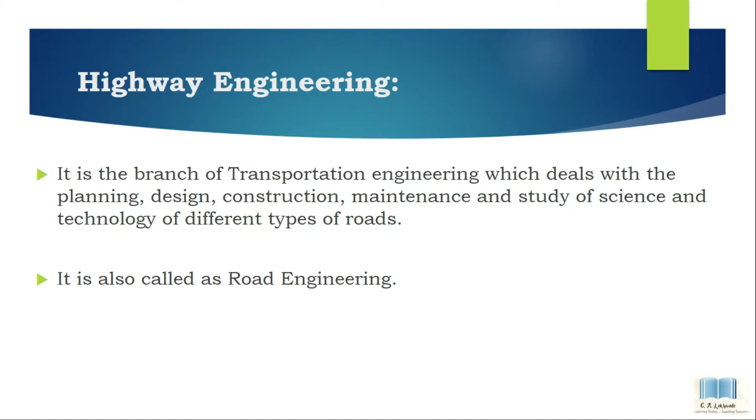Now we will discuss the scope and importance of highway engineering. As we know, population is increasing day by day, so transportation is very important and necessary. Transportation is directly or indirectly related to the development of a country or human beings. According to development, each and every facility is available in a particular area, and that facility can be provided if transportation is good and clean.

The first point is that easy and quick transportation of men, machines, animals, materials and goods can be made, meaning if transportation is good and well developed, then transport of anything becomes easy and quick.

The second point is that areas connected by proper means of transport can develop fast, meaning if an area has proper transportation, that city or town can develop very quickly. The third point is that remote and rural areas become accessible and communicable if connected by proper means of transport.

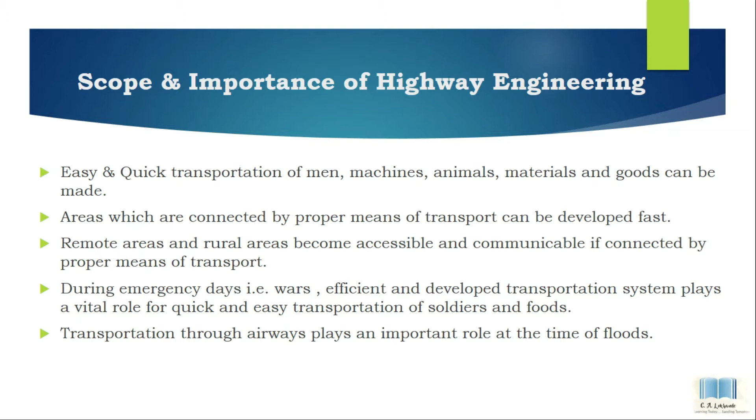Our next point is the modes of transportation system. There are 4 modes of transportation: first is road transportation, second is railway transportation, third is airway transportation, and the last is waterway transportation. Apart from these major modes, other modes include pipelines, belt conveyors, cable cars and ropeways.

The modes of transportation refer to the way we transport from one place to another place; that way is called a mode of transportation. The means of transportation are by land, water and air. Transport by land is feasible through roadways or railways, and both are easy and economical. The other means, waterways and airways, are very costly. So these are the various modes of transportation: road, railway, airway and waterway transportation.

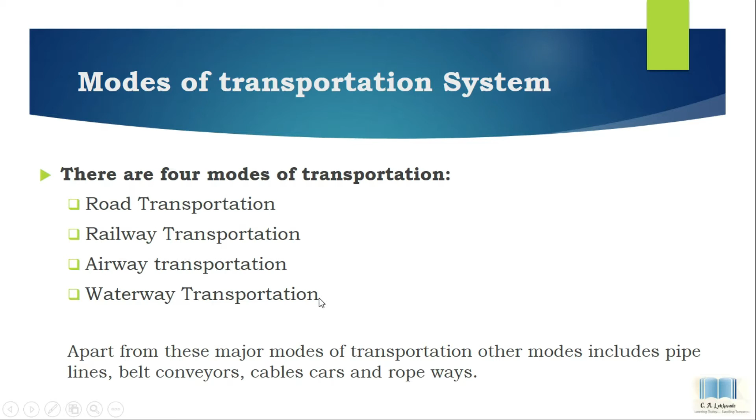Now we will see roadways or road transport. What is road transport? Road transportation is the most suitable type for short distance passenger and goods transport. It is suitable in hilly terrain where other transport modes cannot reach, and it is suitable for all types of passengers. It also provides door-to-door service. Now we will see the merits or advantages of roadways.

The first merit is a number of smaller units like scooters, rickshaws, cars, etc. are available for personalized transport. It is suitable or better convenient for personalized transport.

The second point is they transport men and materials from one part to other speedily and easily. From well and good roads we can transport men and materials from one part to another part very speedily and easily. The next point is it is ideal for non-bulk cargo, especially passenger.

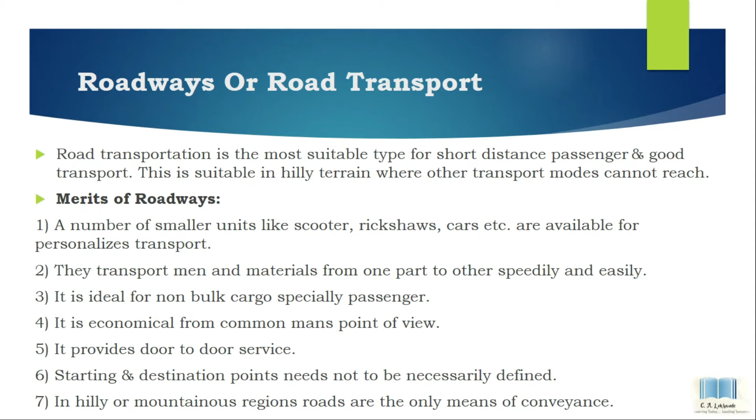Now we will see the demerits of roadways. The first point is suitable for short distance only. It is not suitable for long distance, only for short distance.

The tractive resistance of wheels to the road is more, therefore more power is required. With more use of roadways, the tractive resistance of wheels to the road is more and therefore it requires more power.

Then the next point is rates of accidents are very high. The ratio of accidents is very high as compared to other modes.

And the last point is because of the bulk and presence of other traffic, there is restriction on speed. Due to traffic volume, there is a restriction on the speed. So these are the demerits of roadways.

This picture shows the roadways.

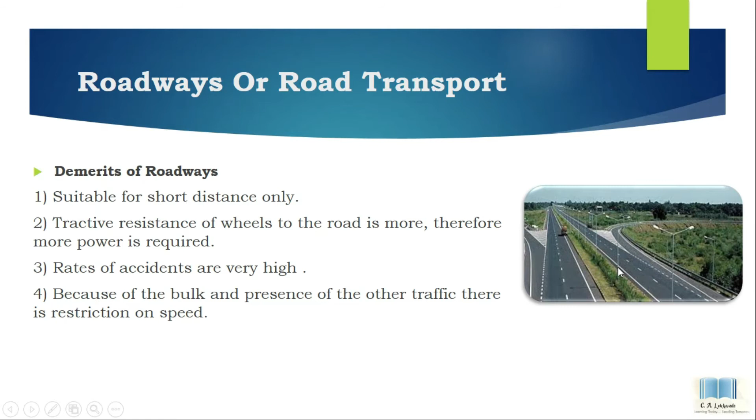Now the second mode of transportation is railways or rail transportation.

The best alternative for land transportation of bulk goods over long distance by vehicles is the railway. Railways provide fairly comfortable and safe journey within the reach of the common man.

Nowadays, railways or rail transport is the lifeline of the nation and also more essential for mass transportation of men as well as goods for long distance. Also, railways provide fairly comfortable and safe journey within the reach of the common man.

Now we will see the merits of railways. First point is it provides economic means of transportation for common people. Railways are economic as compared to other modes of transportation.

Then the second point is traveling in railway is safe and comfortable. The journey from the railway is safe as well as comfortable.

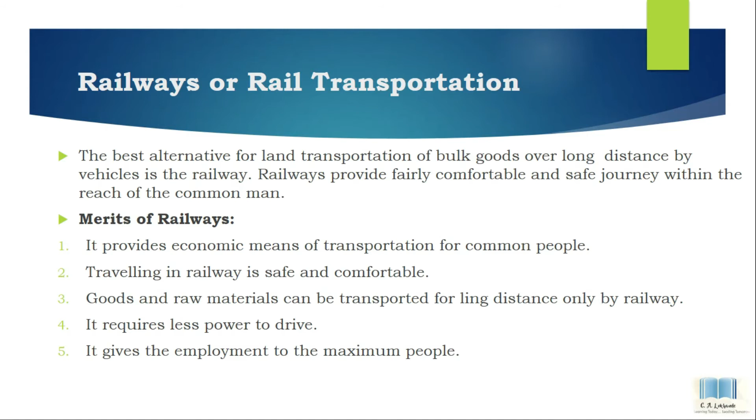Now we will see the demerits of railways. The first point is destination point and starting points are fixed and cannot be altered. This is the main disadvantage of railways, that we cannot alter the destination and starting point.

Then the second point is cannot provide door-to-door service. This transportation cannot provide door-to-door service because the goods have to be loaded and unloaded at stations and this depends on road transport. Then the third point is the cost of construction is more

and it requires maintenance frequently. So its construction cost is more and the maintenance cost is also more as compared to road transportation. So these are the demerits of railways.

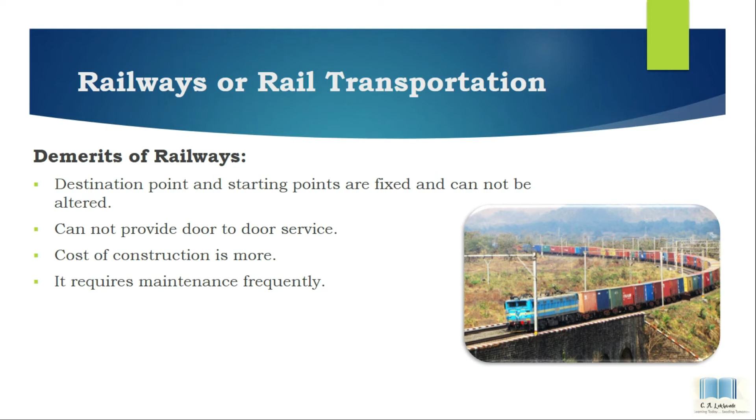Now the third mode of transportation is airways or air transportation.

The most sophisticated and advanced mode of transport is the air transport. Tourism industry has been developed to a great extent by this mode of transport.

This type of mode of transportation is fastest as well as sophisticated mode of transportation as compared to other modes of transportation. It gives very fast service in a small time. We can travel the world. So this is the advanced mode of transportation.

Now we will see the merits of airways. Very sophisticated and fast mode of transport. This transportation is very sophisticated and fast mode of transport.

Then the second point is it plays an important role in wartime defense of the country. At the time of war it plays an important role.

Then the third point is during emergency supplies to remote areas can be immediately made. It supplies materials or anything immediately to the remote areas.

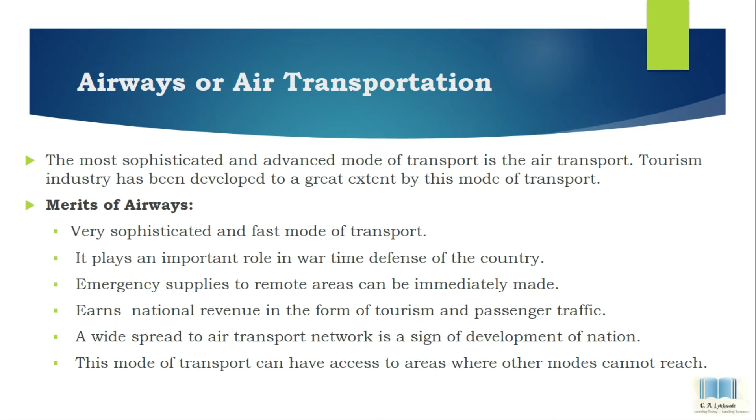Now we will see the demerits of airways. It cannot be afforded by the common man because the system is costly. This system cannot be afforded or is not suitable for the common man, as this mode of transportation is very costly.

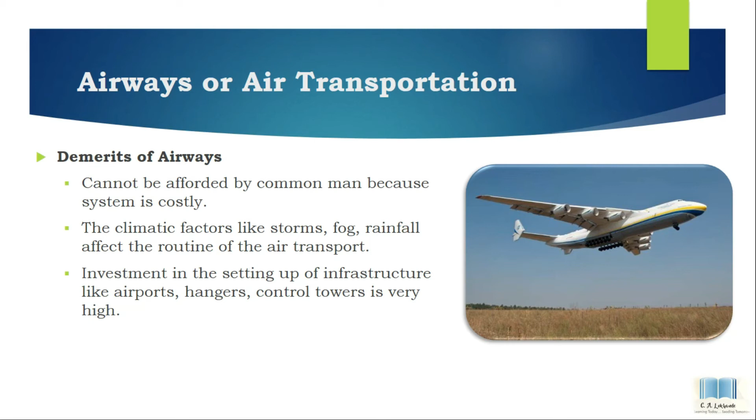The second point is that climatic factors like storms, fog, and rainfall affect the routine of air transport. Due to these climatic factors, the routine of transport gets affected. The last point is that investment in setting up infrastructure like airports, hangars, and control towers is very high. So these are the demerits of airways.

Now the last mode of transportation is waterways, or water transportation. The branch of civil engineering which deals with planning, designing, construction, and maintenance of water transport is known as waterways. All of us know about waterways. This is the oldest mode of transportation. From the definition, it deals with all the factors such as planning and designing.

The development of waterways has been achieved after the Second World War. This is a time-consuming mode of transportation.

Now we will see the merits of waterways. The first point is it is an economic mode of transportation. The second point is it can carry heavy loads over long distances, suitable for bulky materials like oil, coal, and timber. The last point is it requires less power, as compared to other modes of transportation.

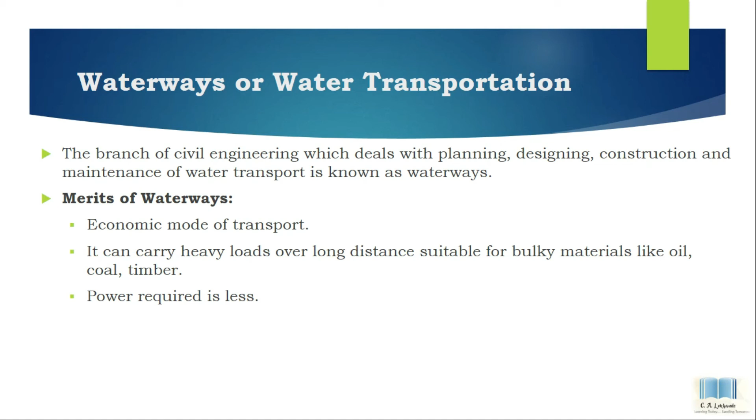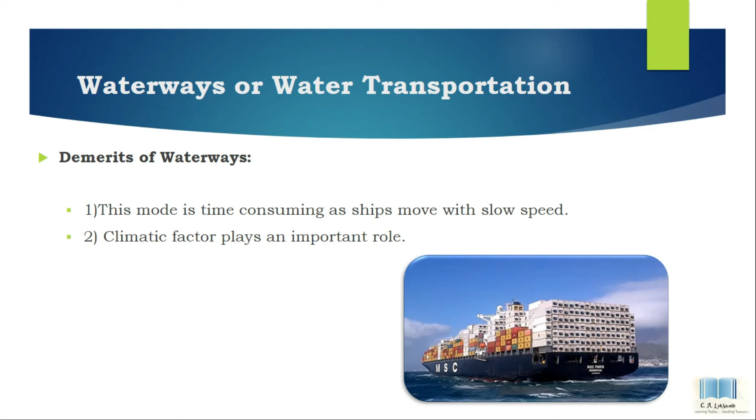Now we will see the demerits of waterways. This mode is time-consuming as ships move at slow speed. The second point is that climatic factors play an important role, as storms may damage the cargo or ship.